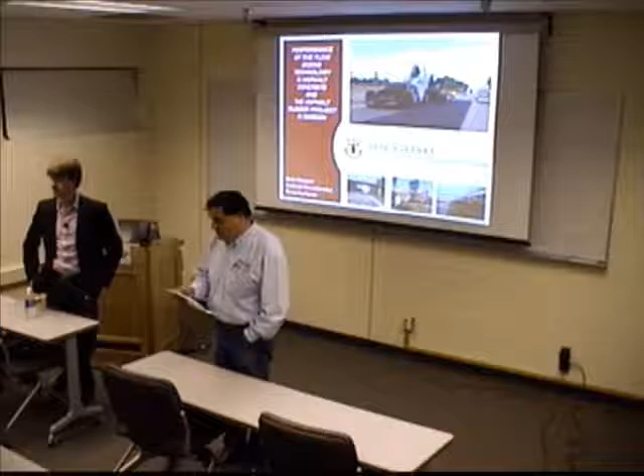So let me properly introduce him. He's a certified European professional engineer who has worked with road pavements for more than 20 years. He's active in a number of technical committees within Sweden as well as international. And he is the chair of the Swedish Association of Laboratory and Field Methods for Testing Road Materials. He was visiting Minnesota DOT as part of an exchange of information. That was in 2009. So he didn't miss the cold weather in Sweden by being in Minnesota.

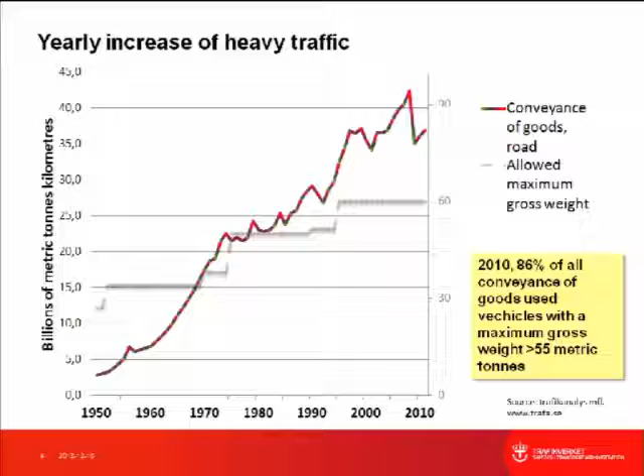And if we look at the paving market, I would say 99% of the pavements are bituminous pavements, asphalt pavements, less than 1% cement concrete. So we use a lot of asphalt paving. And the season for paving is short. It's between May and October. It happens that we also pave during November, sometimes even in December. It's not recommended, not allowed, but still we have a fiscal year that ends New Year's Day, so that means money's got to be spent.

The Swedish Transportation Administration, STA, is the end user of somewhere between 40 to 60% of the total market. So we are the big funder for a lot of the projects. And we also use about 10 to 15 million square meters of chip seals. So that would be closer to 15 to 20 million square yards of chip seals, quite significant. And we also use 1 million metric tons of soft asphalt mixes. That is mixes that are very soft.

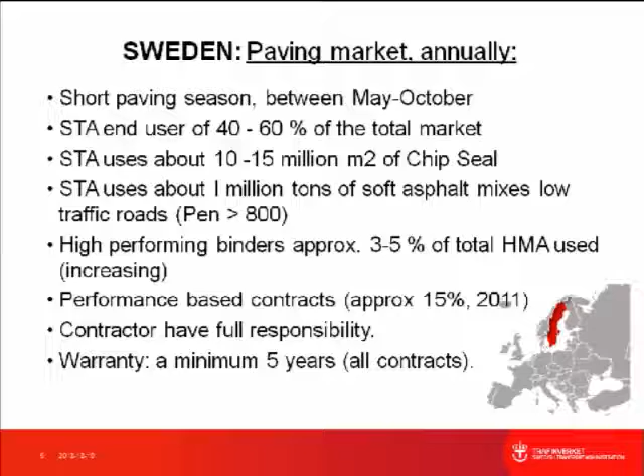When it's performance contracts, it's very easy to say that, of course, we're going to measure the performance over time, so that is in the contract. But when it's a standardized contract, we have a warranty procedure for that. And the warranty differs from the way the warranty has been introduced in the US. But that would take another lecture to let you know all about our warranty systems. So that was a little in brief about the road administration and the transport administration and the Swedish market.

So if we look at this performance of the flow mixing technology, that is a different technology. I want to acknowledge also the company KGO Mixing, where the inventor, the scientist behind this, his name is Carl Gunnar Ohlson. So that is the acronym for him. But also VTI for doing a lot of the research, helping us to evaluate the performance of these roads. And to explain to you a little bit about what is the flow mixing technology.

It is a technology to produce asphalt concrete mixes with same or better quality without use of extra additives. It's a technology where you can reduce temperature also. It has to be reduced without introducing an additive for that or foaming. So it's a warm mix technology, but this was developed way before warm mix. So it's through a controlled way of production. It reduces valuable sources of raw materials, saves energy, and gives long-lasting products.

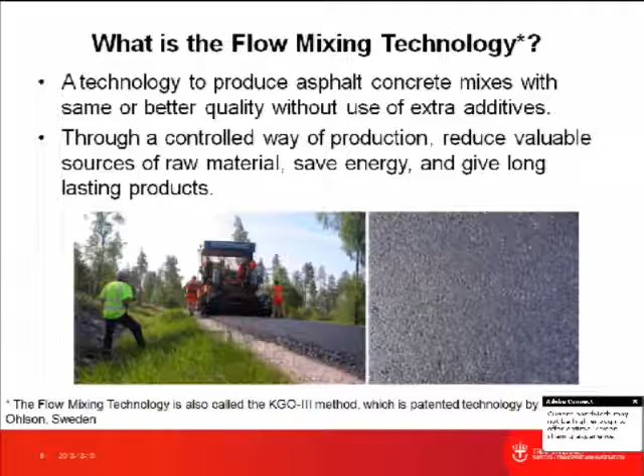So, the flow mixing method, the principles of mixing here is that we have a, let's see, can we? This one is not supposed to start until, well, it does. I'll back up later.

You know, when you sieve the material in a batch mixing plant, you can split it into a coarse fraction, you have binder, you have filler, and you have fine fraction.

And well, is this self-running? Shouldn't be.

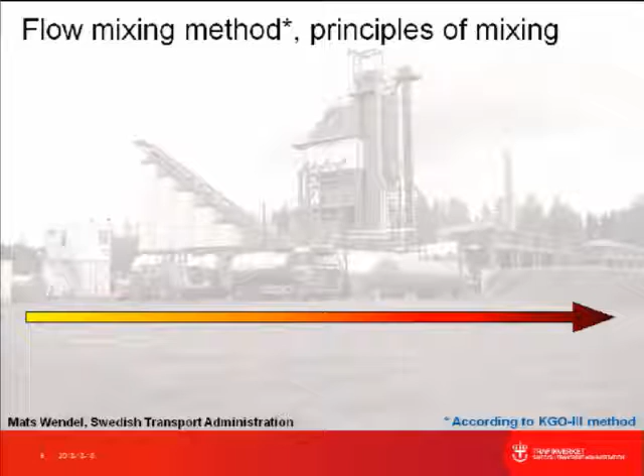So what we introduce is to have the coarse fraction, drain it with the binder, all the binder in there, put filler in a controlled way, distribute it evenly, and make the whole mix swell. And then we introduce the fine fraction rapidly. And that's basically mixing until black. So that is the principle.

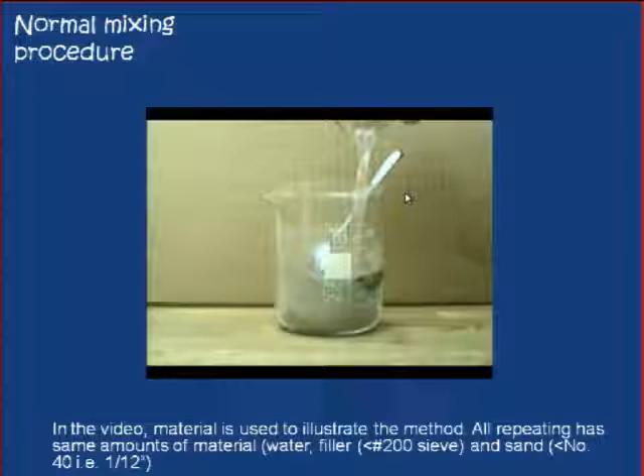And to illustrate this principle, we start with the normal mixing procedure in an asphalt plant, which is to have all the dry material added at the same time to the mixer. There are small differences in that, but basically that's been done. You add all material, you mix.

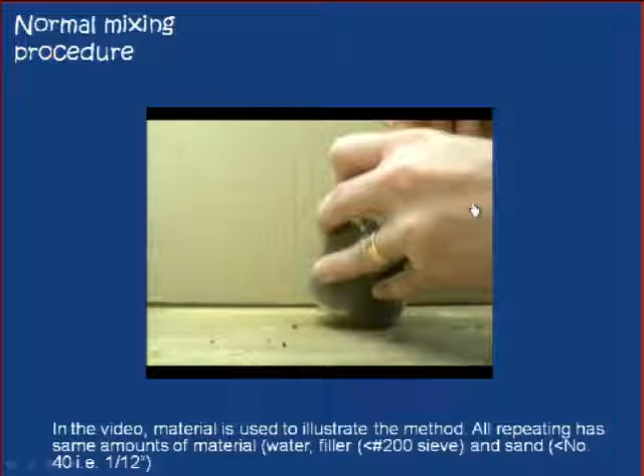Oh, sorry. Let's do this. And for you online, it was only the sound that went. I'll rerun it. Hope everyone can hear the sound now.

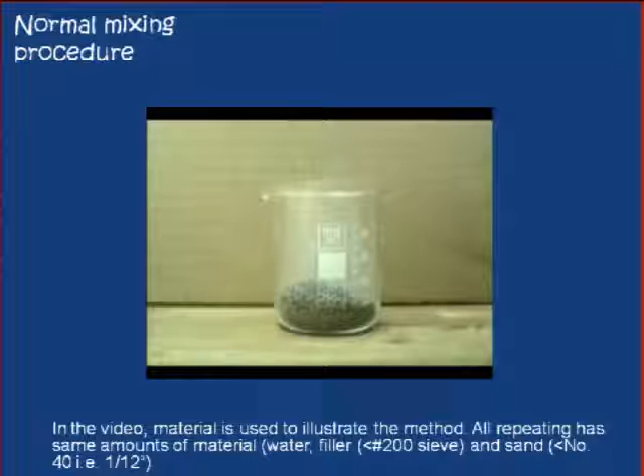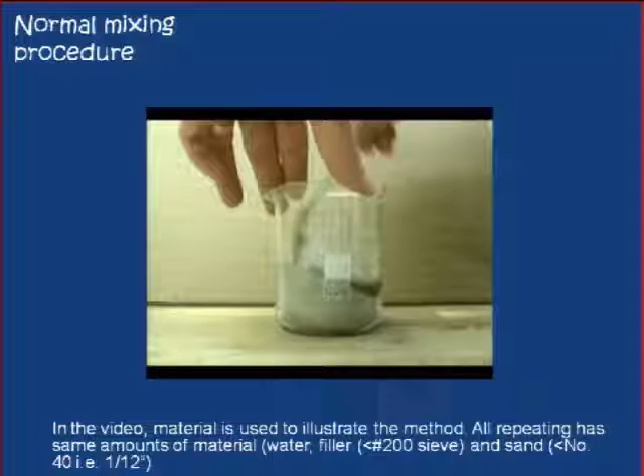So we add all the dry material, and in this case we also use water as a liquid instead of a binder, so you can see what actually happens. And mix. And it's my hands, so I'm not telling you anyone else is doing this. This is me. So I've done it.

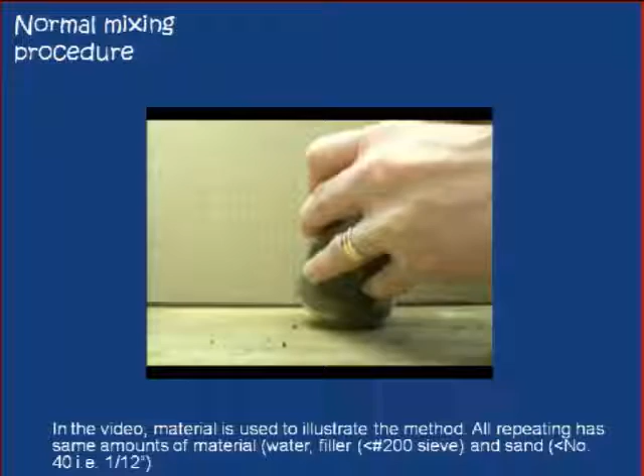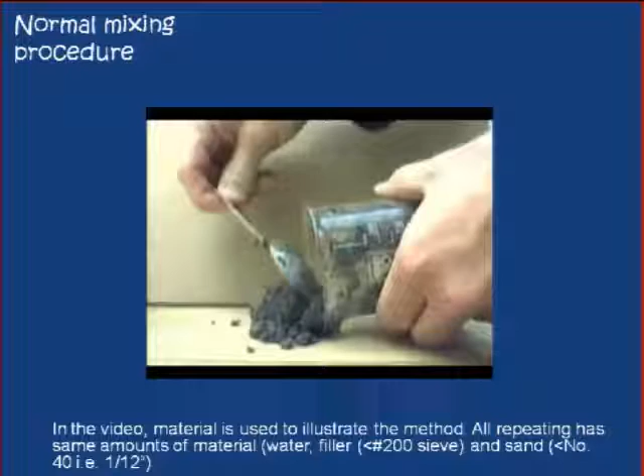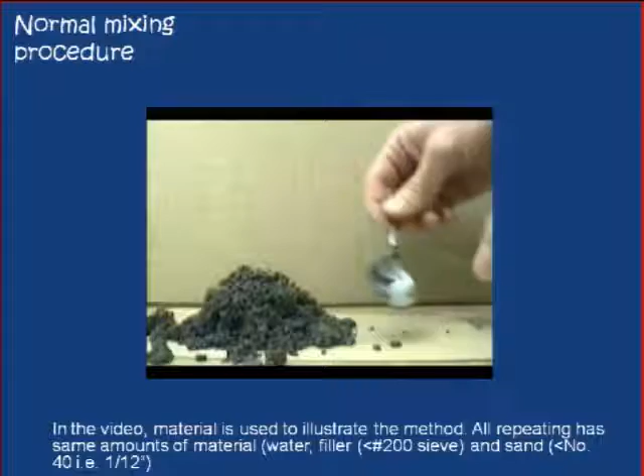So, mixing until everything is mixed, and then we pour it out. And so that was the paver, and here comes the compaction. And so we compact it.

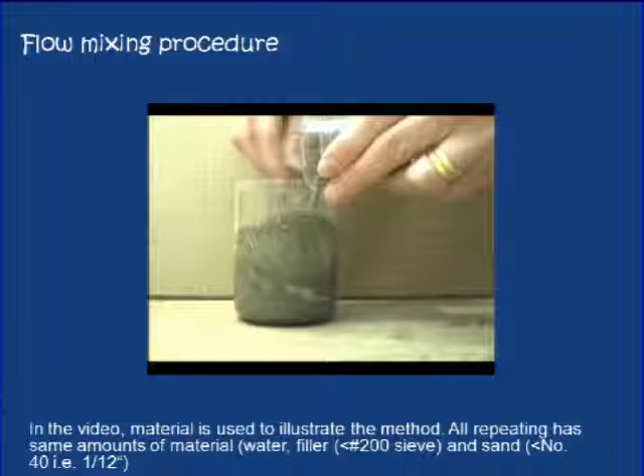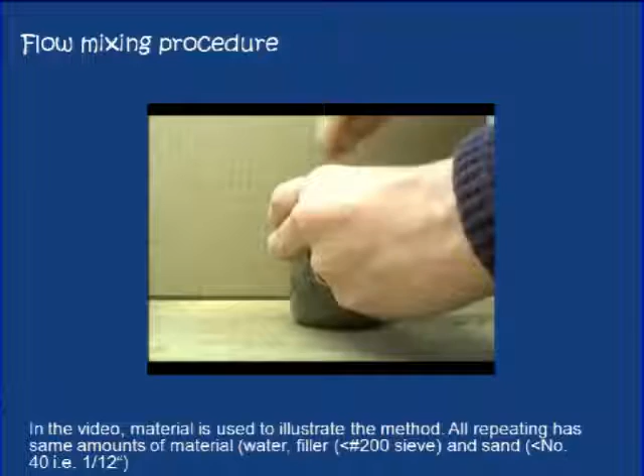And then we use this different technology. Then we add the liquid first, because we don't have a coarse fraction. Add the fine fraction to it. Mix, so all the fine fraction and water distributes evenly, and then the coarse fraction quite rapidly goes in and mixes around. And then I pour that one out next to the other one and hope that you will see a difference. So let's pour that one out.

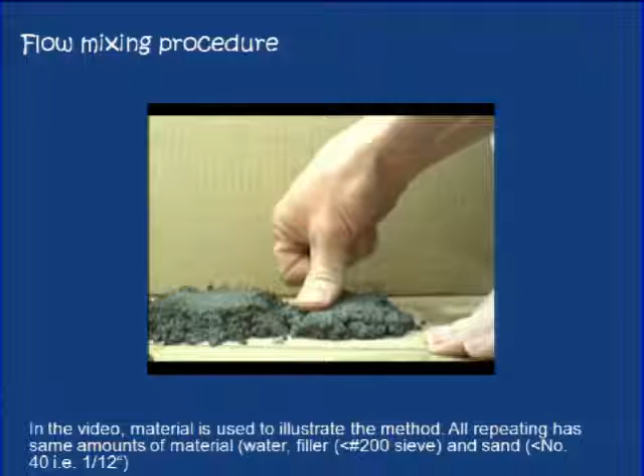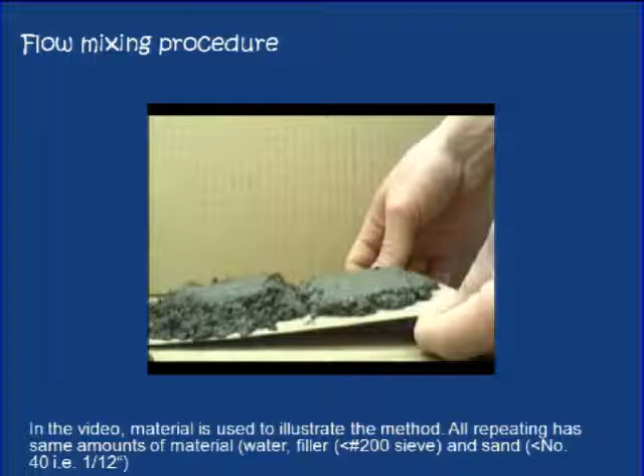And it's important to state this, that it's the same amount of materials, no difference there. And we compact this a little bit, hopefully. And this test can be repeated. So when I recorded this, I repeated it twice, but you can repeat it, and it's a really good learning curve there.

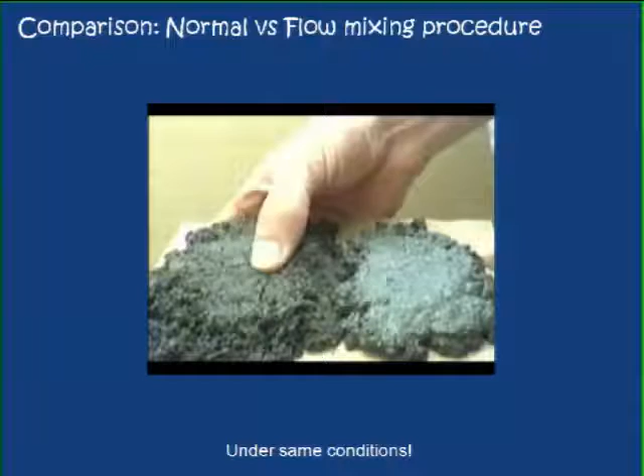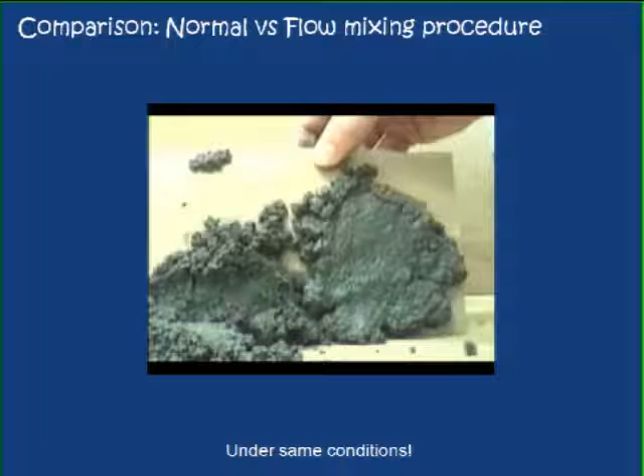So this is a comparison between these two, non-compacted. That one is acting the way it should, probably, and this one is acting strangely, because it's only binder and materials. And can you see a difference between these two? And those are under the same conditions.

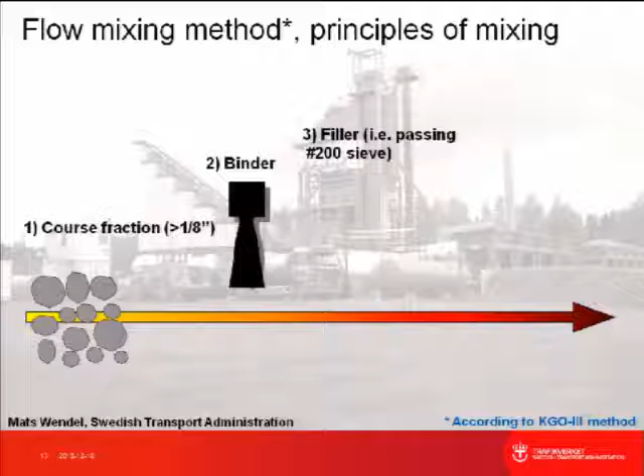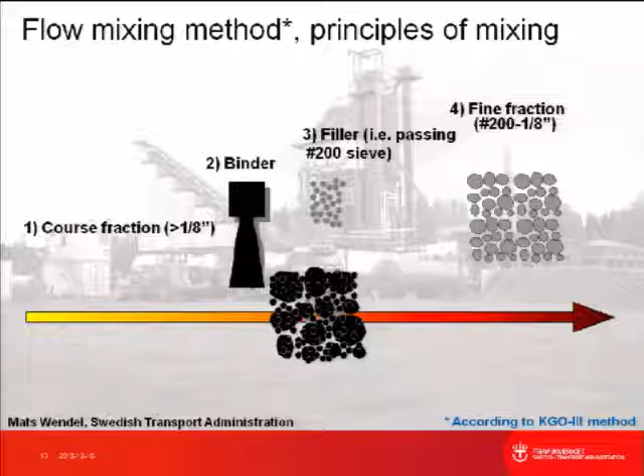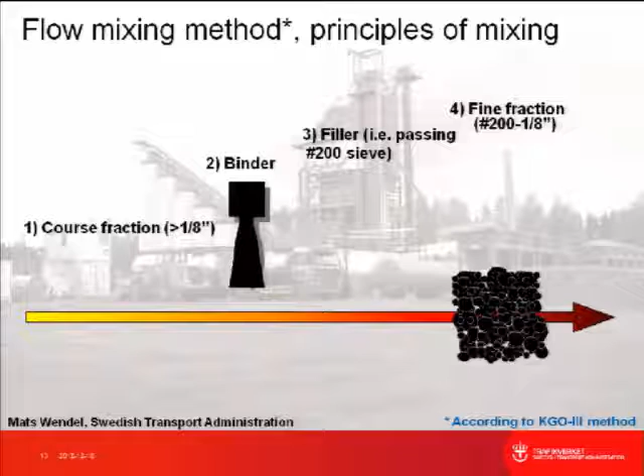So again, the principles of mixing: coarse fraction, binder, the filler, the dust particles go in, make the swelling, and then we add the fine fraction. And I don't know if there are any questions about how the method is done, or no. So I'll go on and show some examples from the real roads.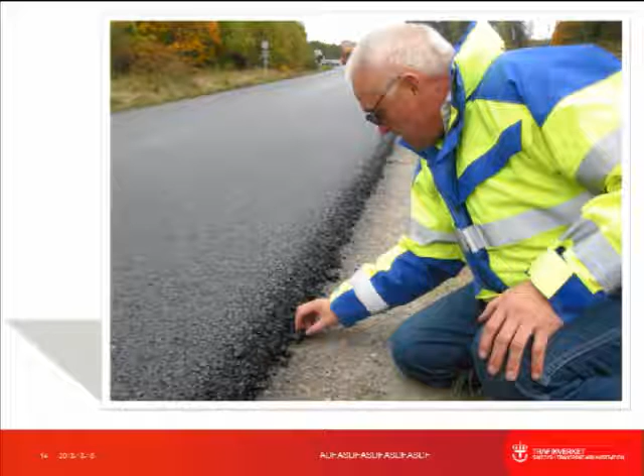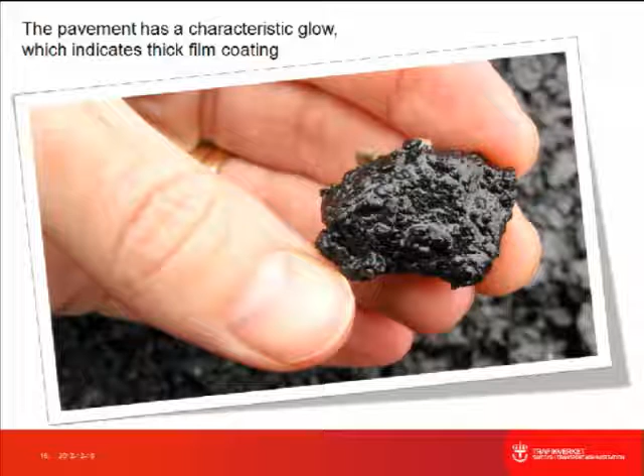When you're out on a paving site looking at this, we were fascinated, and we took some material from the side of it. When you look at it, it's got a characteristic look, and that indicates this thick film, the film thickness here, the coating, and that you also got the particles distributed evenly.

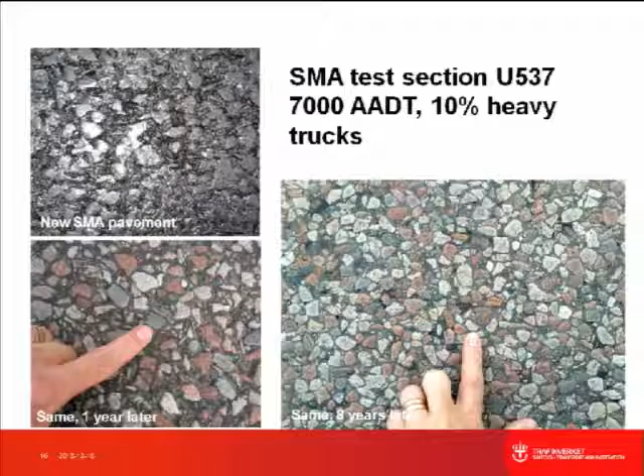If you compare it and we look at the test section, this one has 7,000 AADT, the traffic amount, 10% heavy trucks. When it was new, a year later, and this is 3 years later. It's pretty much the same surface. Very interesting project.

And what we've seen with this, by using observations and testing, is that we have to control the temperature. If we raise the temperature too much, we will have bleeding issues, drainage issues, drain down. And we also might destroy that thick film thickness. So we don't want to do that. In the top layers, the wearing courses, we use binder-rich layers, probably richer than you do here.

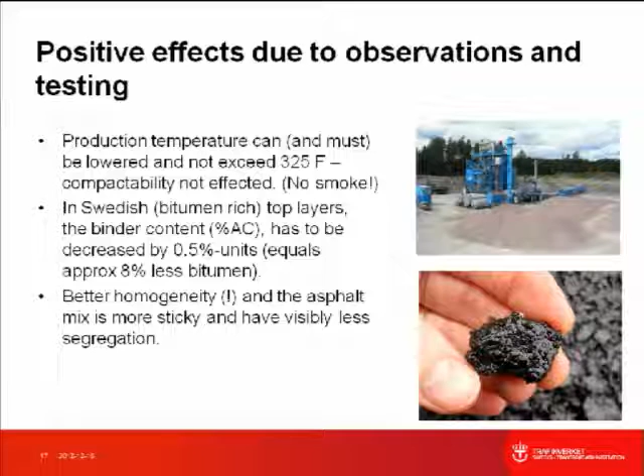We found that we need to decrease the amount of binder because it's too much binder. So we decreased the amount by up to 0.5 units. And we also see better homogeneity. The asphalt mix is more sticky and has a lot less visible segregation. So you can't really see where the trucks left the paver.

And this is really the key to ensure quality, because as an agency we had contractors perform the work, because we are only buyers. We don't have any equipment ourselves. We don't have any laboratories ourselves. We described the method, we paid them extra money to use this method, so we needed to know that they actually used it. So this was the way we could control it.

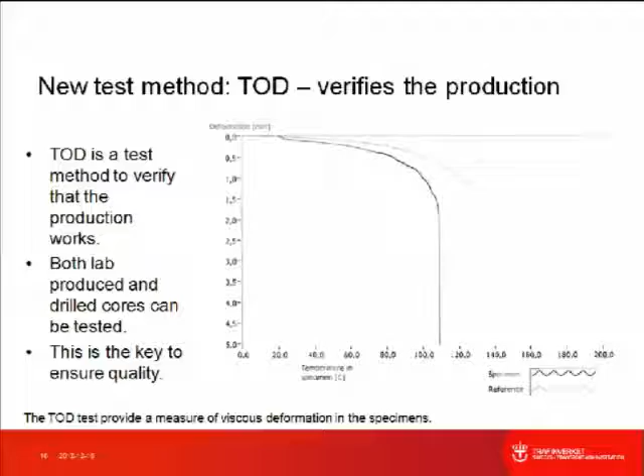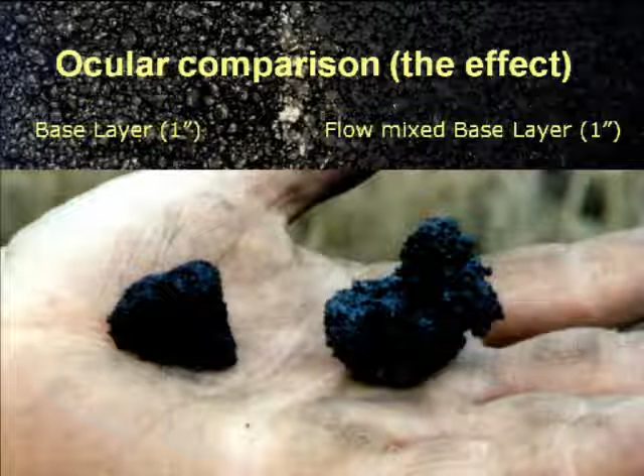In a base layer, where the maximum aggregate size was 1 inch, so it's a very coarse mix, we could really see the difference visibly, that the binder is used more efficiently in that mix. We've tried this on a number of different mixes, on a number of different binders as well, and we've tested all these different parameters.

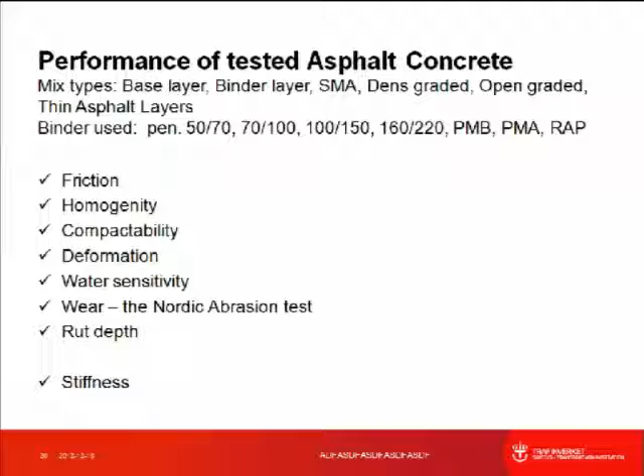One of the interesting things, especially if you lower temperature and binder content, is the freeze-thaw and salt water test. We have a special test for that used in research, called the winter conditioning test, that VTI does. They have a limit of 70 for saying that this is a good performing mix. So we looked at all those with the KGO method, and I think the slide has jumped a little bit.

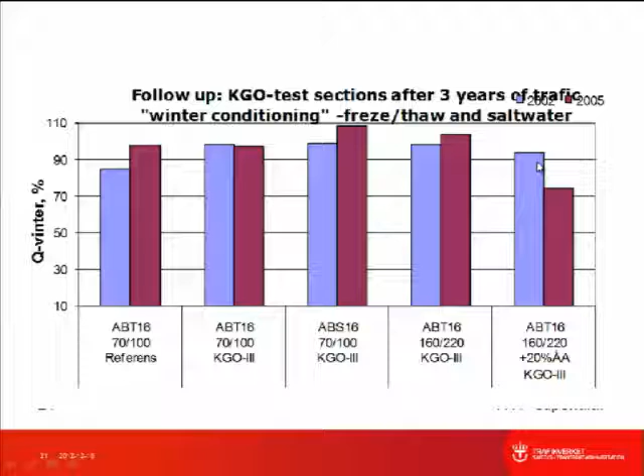On this side, you can see the 2002 values, and this is the 2005 year. So with 3 years difference, the reference increased a little bit. The KGO sections are performing really well. This one, however, had a decrease after 3 years. What's special with this one is that this is the test section where we first introduced RAP. So can you use this method with RAP?

Yes, you can, but what we found was that you've got to have the RAP introduced with the coarse fraction, and you've got to add mixing time to get the temperature in the RAP up. And this wasn't done. This was the first test of it, the test section. What was interesting was that this test tells us that this road should fail before the others.

We're still monitoring these roads, but that section is the only one that got a lot of cracks in it. So this one is going to get maintenance activities before all the others. And we're still evaluating, because it's interesting to look at roads now that they're 10 years old. So that's what we're doing.

You had a question? What's actually being measured in this plot? This is the indirect tensile strength test. It's very similar to the Lottman test, although these are core samples from the road, 5 samples stored dry, 5 samples conditioned. But instead of cracking the specimens, these are stiffness values.

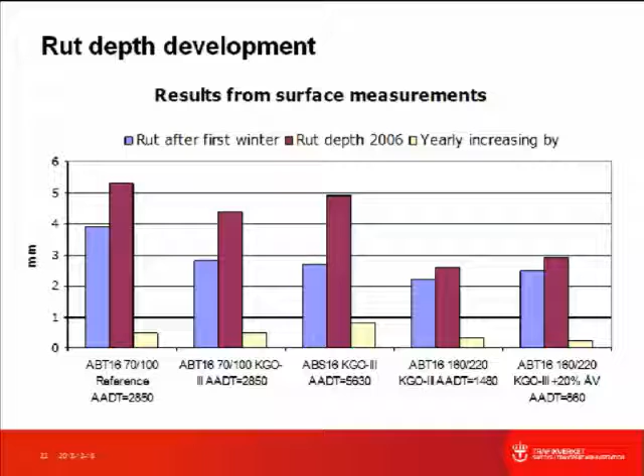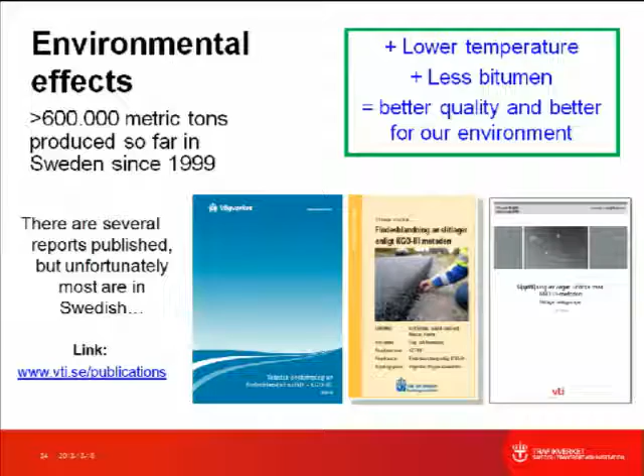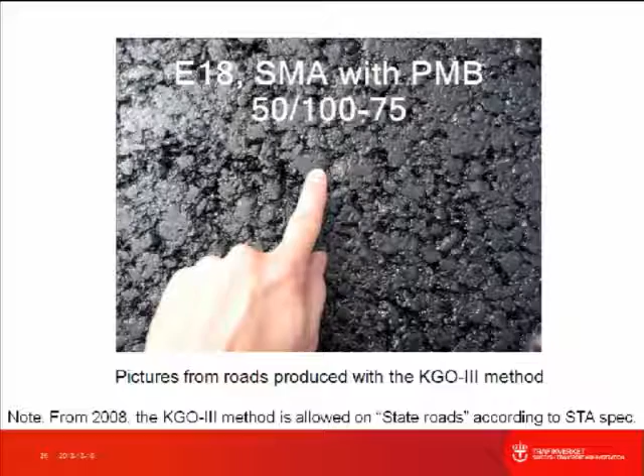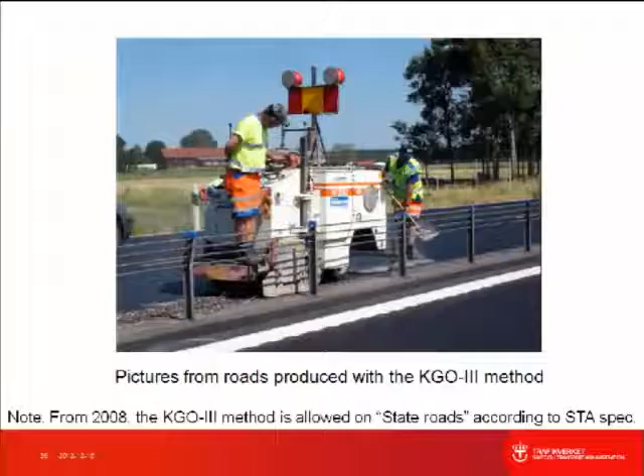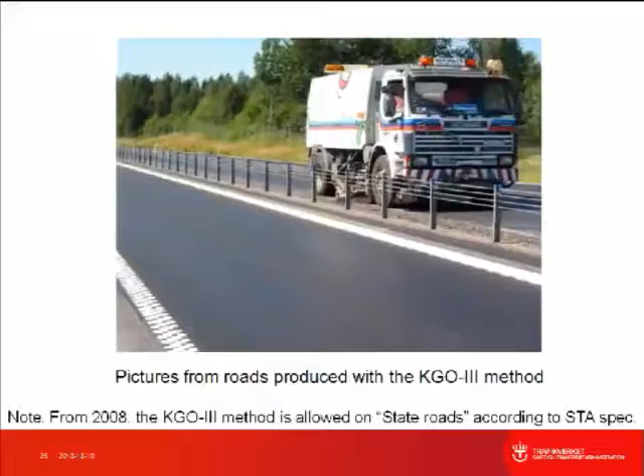Just a few pictures from other roads produced with this method, and also you can see pictures from maintenance activities on roads, typical roads in Sweden, pavers. This was a high-profile project where we have a lot of traffic. Those wake-ups, you have those as well, wake-up lines. We also introduced rumble strips in Sweden. We have a lot of them now.

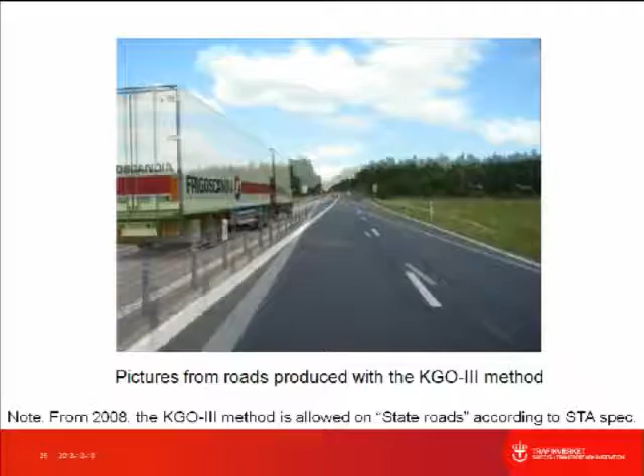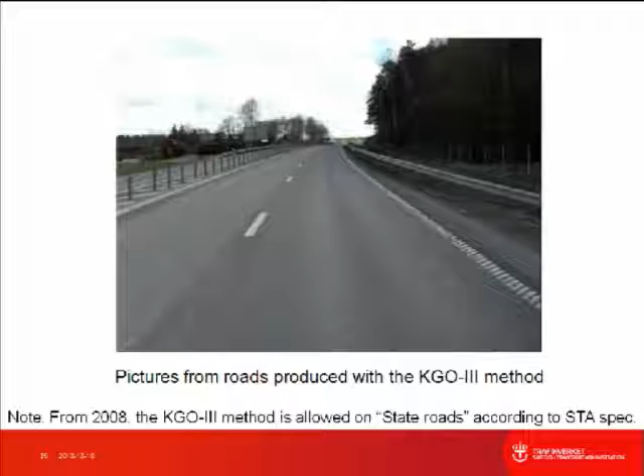That road was paved in 2005. It's got 18,000 AADT in each direction, so it's pretty heavily trafficked for being such a narrow road, and it's still performing.

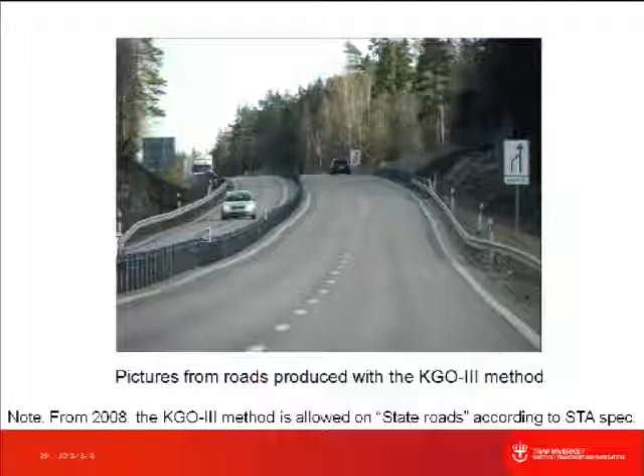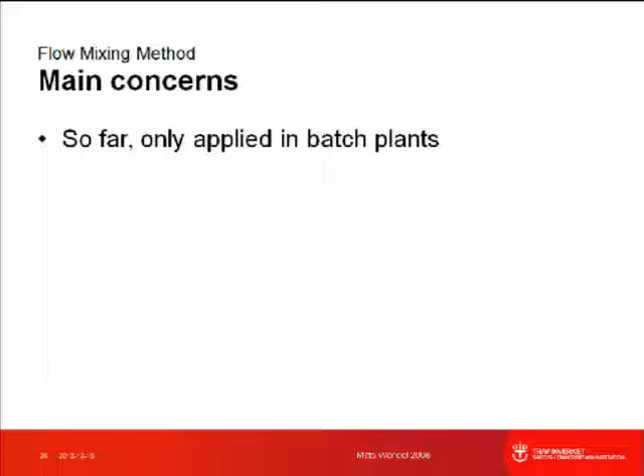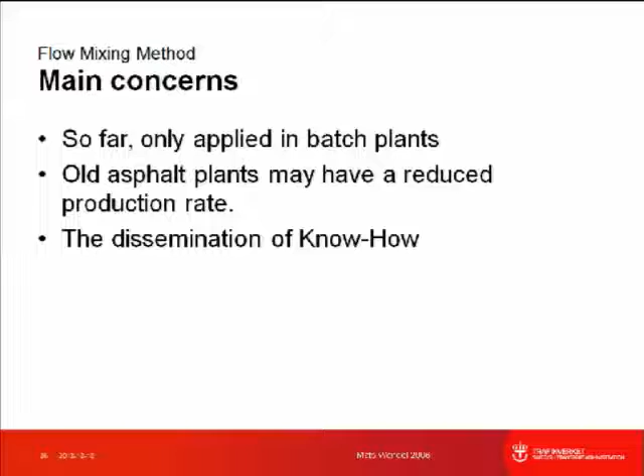Some main concerns about this method. Well, I mentioned the batch plants. Old asphalt plants may have a reduced production rate because of this mixing sequence. Of course, dissemination of know-how. It's not easy to learn this. And it's also very difficult to perform this procedure in the laboratory.

And some adjustments, such as gradation as well, AC content may be out of spec. It might not be allowed, but when we produced it, it still performs really well. So this might be the greatest hurdle to try to get over, which is the not invented here syndrome, the reluctance to try, that people don't want to try it, don't want to see it.

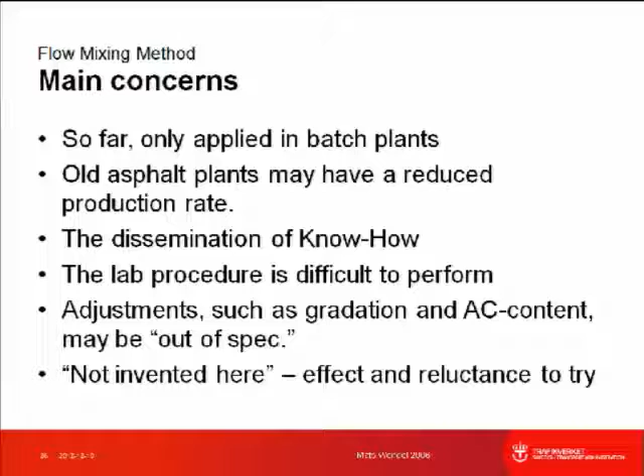So I've spoken about the advantages, the segregation. The deformation stability I haven't mentioned, but it's by rut depth if you look at it, and if you look at the test results we have, excellent performing. I've come across a few tender zone mixes, especially here, but this mix doesn't have a tender zone, and it's known. It's got years of good performance, and we can also quantify the environmental effects of it.

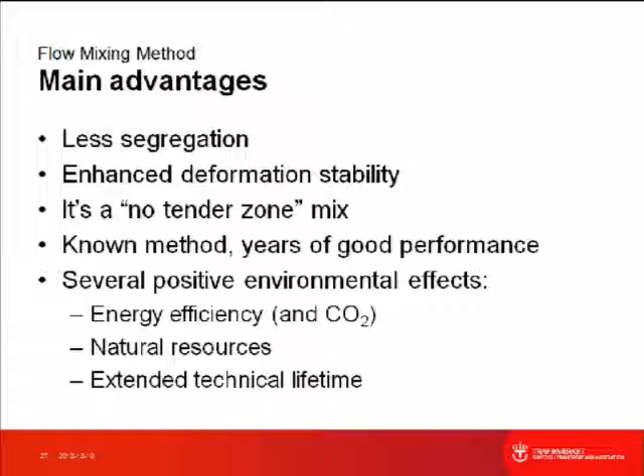And by that, this is the last picture of the KGO method, flow mixing method. Any questions about that? Interesting, or? It's quite different. It's a different way of looking at it. And when I've met people at conferences, when you say that we've looked at the mixing technology, they're quite interested because it's not that well covered. How to mix was defined back in the 50s. So, yeah.

I have a question from our online people. They are asking, what is the typical binder content? Of an asphalt mix in Sweden, a wearing course would be 6% asphalt content by weight.

Do you have any reason why this kind of mixing technology is producing mixes superior to the conventional ones? Do you have some physical reasoning to justify this? No, I think basically it's that thick film thickness that helps the mix, and the compactability of the mix. We use quite low air void content in the mixes. They're in the range of perhaps 3, 4, 5%, but not above 5%. That helps the mixes. Helps keep the water out of the mixes too.

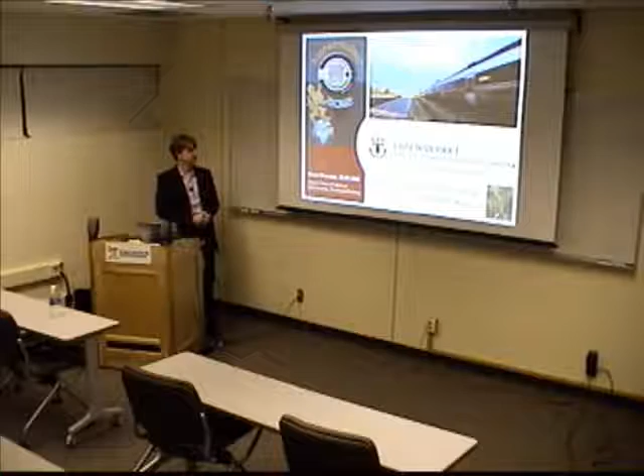Okay, should we move on to next? Because this is a presentation I made very recently. I went down to Munich for the World of Asphalt Rubber conference. That is an international conference. It was 170 participants. And that's why I also have the translation of the Swedish Transport Administration in German here.

I didn't mention this before, but the vision for the Transport Administration is that everybody arrives smoothly the green and safe way. So here's another picture of where Sweden is in Europe, if you look at it. On the sides here, let's see. We see Norway, we see Finland, we have Denmark here, the Nordic countries, we have Iceland over here.

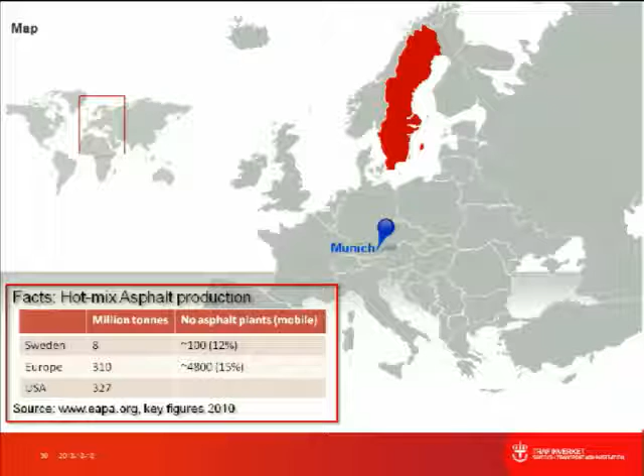And I also pulled up some facts about hot mix production. In Sweden, we produce 8 million tons of asphalt mix a year, approximately. Europe, it's 310. In the US, 327. And I should say that those numbers are reported by NAPA and EAPA. And if you go back just 2 years before, these are numbers from 2010. So in 2008, it was 500 million tons in the US. So the economic downturn really hit the paving industry in the US.

We've spoken about challenges and the traffic, but asphalt rubber is a new concept for road pavements in Sweden. It's not a new concept, but it was for us. And we started a project from 2007 until 2009, a 3-year project where the road administration at that time was the main responsible part. That meant that we took the responsibility for what the contractors produced when they produced asphalt rubber. We also rented in equipment and staff to produce it, and we tried to produce asphalt rubber in the best way we knew.

From 2010 and ongoing, we have a continuous study of produced test sections, and we also have continued implementation. And we are also in the situation where we put the responsible part to the contractors. So when we introduced it, we took the responsibility. Now we've proven it for the industry. We want the industry also to be a responsible part.

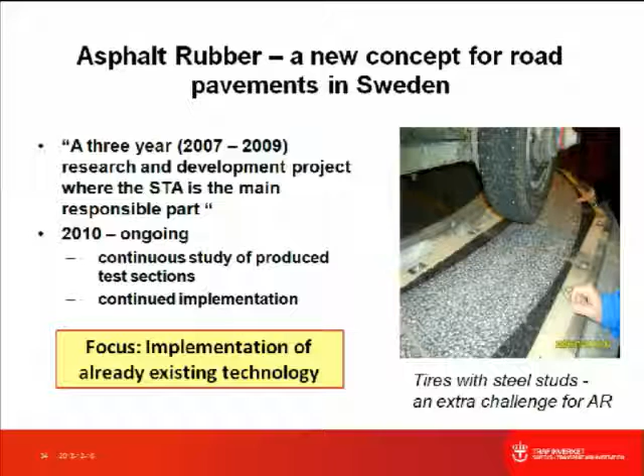The main objective is increased technical lifetime, and that will give us reduced annual costs. So life cycle cost will decrease. We also saw environmental advantages, the reduction of noise as one, and reduction of particle emissions from wear from studded tires. Also less wear. And some about increased traffic safety, better skid resistance, less splash and spray. That was reported in the literature and on other projects.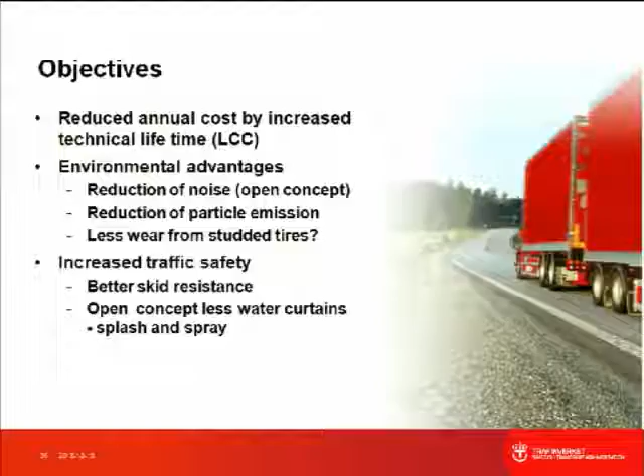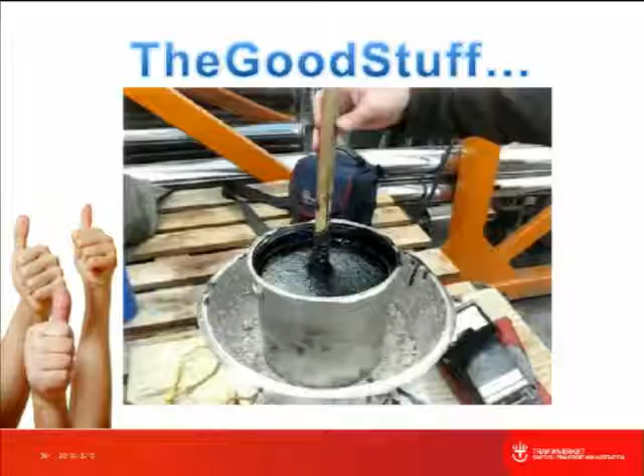The follow-up work really focused more on the technical lifetime, and we have also had some studies of this reduction of particle emissions that are promising. Asphalt rubber, the good stuff. This is a very short video clip. This is what it's all about. I'll show it once more. A binder that has excellent properties. A quick history in brief here.

Back in 2006, it started with a literature study. We went to the US for education. We went to the Asphalt Rubber conference in Palm Springs, California, to learn about asphalt rubber. And we decided to implement the wet technology. Back in the late 70s, we had dry mixing of crumb rubber as a technology used by one of the contractors in Sweden. And they had great success on some of the roads, and also great failures on some of the roads.

And this is a main obstacle why people won't use asphalt rubber. We had the same situation in Sweden. We had to convince ourselves that the wet technology is engineered. We can control this a lot better than we could with the dry technology. There are obviously a lot of environmental concerns when it comes to crumb rubber, when it comes to using old tires. And so we decided to do a lot of environmental studies. We rented a binder blender unit, and we produced the first test sections. That was 2007.

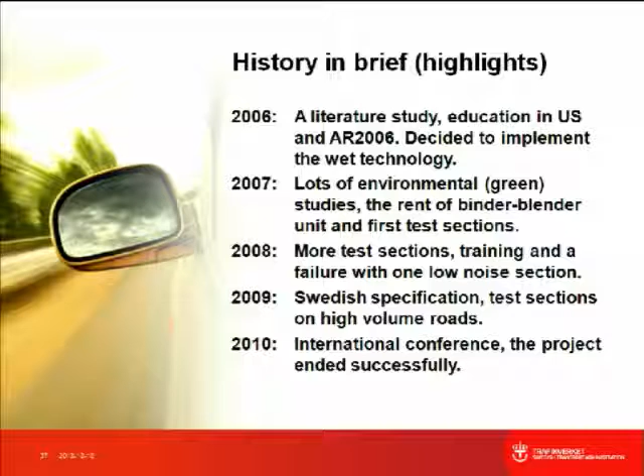We decided to mill it off, not trying to save it, not trying to keep it there. We milled it off, and we put another surface down with a different pavement. That one could really destroy a project if you put something down that is not comparable, but it's still carrying the name of something new that you're testing. So we took that one away, and I think that was good. We learned a lot from that.

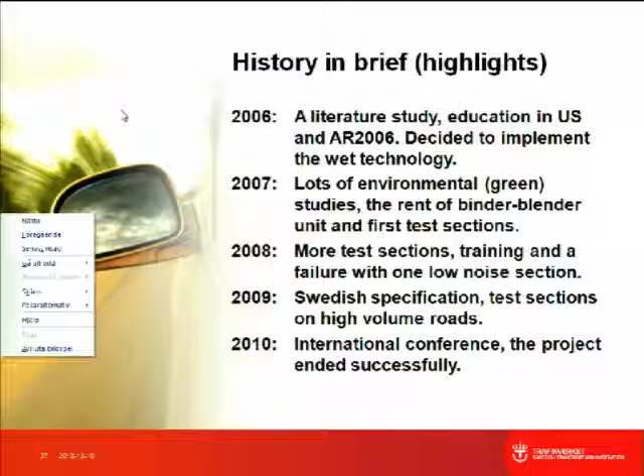2009, a Swedish tentative specification. We did more test sections, and we went out and produced it on high volume roads. In 2010 we had an international conference, and we also ended the first part of the project, the project that started everything. It's important to end projects, because from there you can be successful, and then you can do a follow-up project. So we started a new project in 2010 at the same time, called it second generation, with focus on more low noise sections and follow-up work.

Last year we tried to introduce asphalt rubber in a really cold climate with dense graded asphalt rubber. We also produced a thin layer with asphalt rubber. And we saw that the capacity problems on the blender unit really were a problem for us. In 2012, this year, we put out for bidding an innovation contract for the asphalt rubber blending service.

We also tried something we call a 50-50 evaluation bid, where the contractor in the tendering process leaves two bids, one with asphalt rubber provided with the blender unit, and the other one without. The average of those two bid sums is what you compete with. This gives us, as an agency, the opportunity to choose, but it also covers all the contingency things that can happen. And it was also good for the contractors. They haven't complained, because it's very clearly stated that we buy on the average of two bids, and it's still the lowest bid that wins.

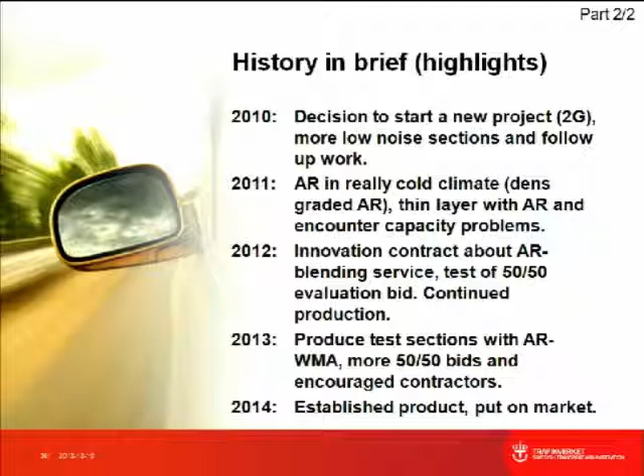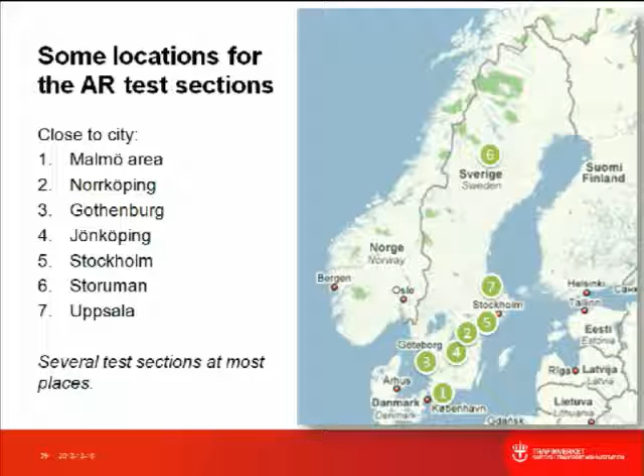In 2013, next year, we will produce test sections with warm mix technology. We want to continue this with the 50-50 bids, and we want the contractors to be encouraged. By 2014, we think this is going to be an established product on the market, where we can buy it wherever we need and want it. Some of the sections you can see here, from the southern part up to the northern part, and several sections at the same location.

I spoke a little about the environmental restrictions. We have a chemical agency that wasn't too happy about us putting rubber into asphalt. We explained to them what we're doing and how we control it, and after a while they were really encouraging us, and thought, well, control this and you're okay. There are technical production issues that need to be overcome. CE marking, you don't have it here, but we have it in Europe. Every piece of equipment has to be CE marked, basically saying that the workers won't be harmed by the equipment.

There's also a hookup issue to hot mix plants. Every hot mix plant might be different. It's unique, so you have to have a unique hookup system for it. And of course, the contractor has to be willing to pay for this. For the crumb rubber supply, we had to buy crumb rubber from outside Sweden, but now we do have a manufacturing unit that can sell us crumb rubber. Of course, mix design and laboratory work are really important. You can't put mix out there unless you control it. You have to know what you're doing.

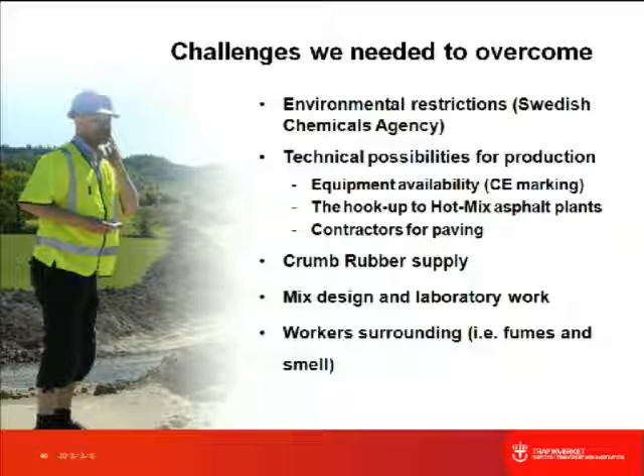And of course, the work environment, fumes and smell. Asphalt rubber has a different smell, so you have to prepare for it. You have to know what it is. If you don't know what it is, you might have a real issue with it. If you know what it is, we haven't encountered those problems.

I stated that the focus was on implementing already existing technology, and in that we also had ASU help us do the evaluation of our mixes, so they could compare. And they're thinking we're putting pretty tough mixes down. They like what they see. VTI helped out a lot.

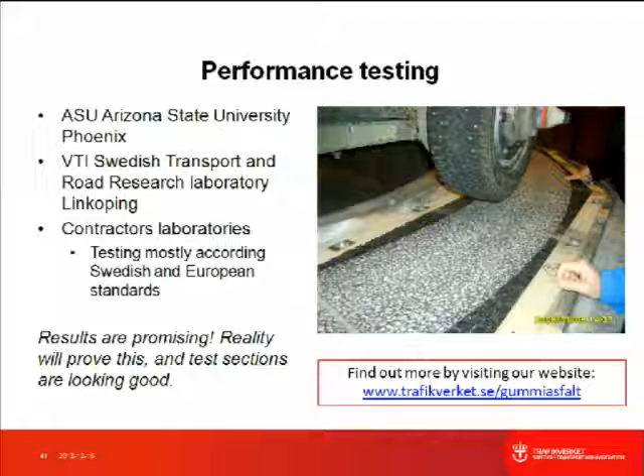We also have the contractors' laboratories, and we have used Swedish and European standards for testing. But we've also used the US standards when it comes to the testing that ASU performed for us. Results are promising. We will see this in reality, but the test sections right now are looking really good.

We focused a lot on environmental studies, and every paving site has at least one measurement done on the workers. So we test every paving site right now. And what we've seen is that the PAH is far below limiting values. Most of the time we can't detect substances. Weather conditions have an influence on the air quality for workers. So if the temperature is high and the wind is standing still, then we have more readings.

We also looked at whether the asphalt rubber binder has increased leaching, and we have found PAH and cresols, but those are low according to limits. And this substance benzothiazole is what we can see, and that is what's giving the rubber smell. It was classified as having no acute toxic effect, but it's been very hard to detect benzothiazole at the worker's site. Particle emissions, we also got lower emissions from that.

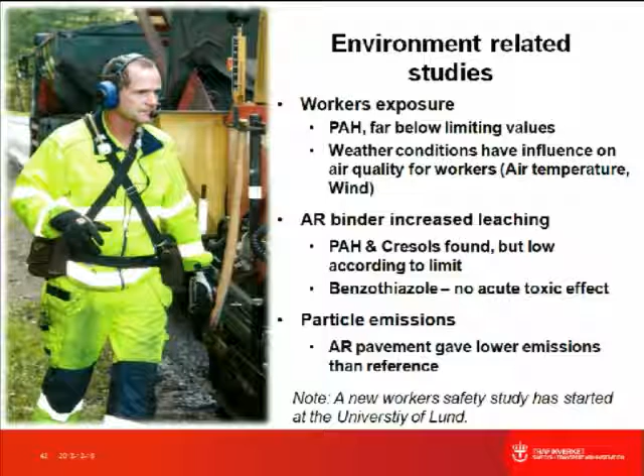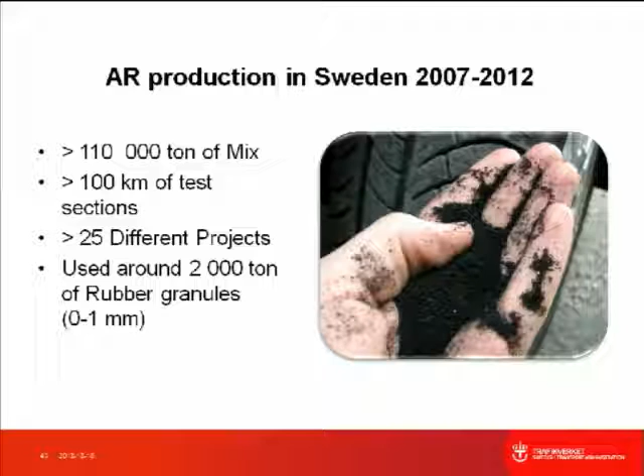Asphalt rubber production so far: 110,000 tons of mix. It's more than 100 kilometers, that would be 60 miles, of test sections, something like that. 25 different projects. We have used more than 2,000 tons of crumb rubber granules. What we've seen is that we can produce asphalt rubber with, as expected, good quality. We can control the environmental issues, and we can't see a negative impact.

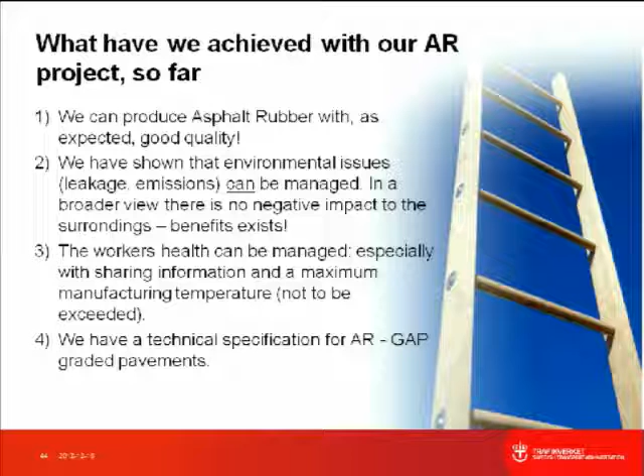Workers' health can also be managed, especially if we share information. And we also have in our specification a maximum manufacturing temperature that is not allowed to be exceeded, because then you have increased fumes. And we also have a technical specification. So it's definitely a concept for Swedish roads.

In any project, a word of advice. A successful project can be achieved if you do your homework. Do your homework properly, investigate, get know-how. That's how you are successful. And you've got to make a plan for the project and get funding, of course. It helps to have skilled personnel, but you also need champions. We had a really good champion in this project, the project leader Torsten, and he's been an advocate for this, and he's really knowledgeable, and he knows what he's doing.

It's also important to manage your risks and see the opportunities. In any project, there are going to be risks. And maybe the most important part is to share your experience, because then people can ask you even more questions, or you might get other inputs. Share your experience, really important. And that concludes the second presentation.

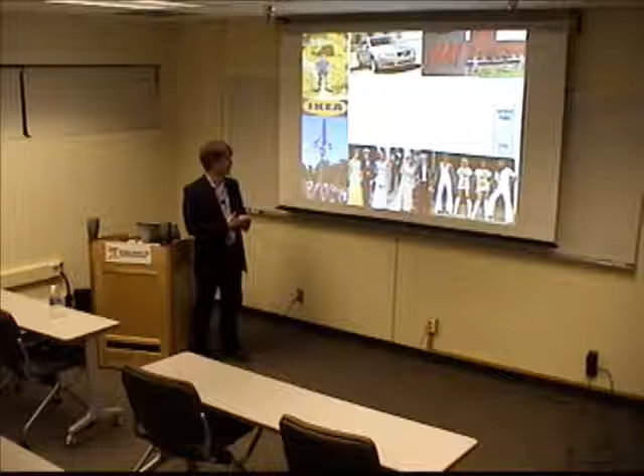So, everyone see what's on the picture? Vodka you identified. ABBA you might know of. The Swedish, well, sometimes people say Kingdom of Sweden. We are royal. We still have a king. And last year we had a baby born. The year ahead of that, our crown princess married, I would say, almost like a farmer's boy or something like that. So that was a fairy tale story, covered by all the news networks all over the world. So.

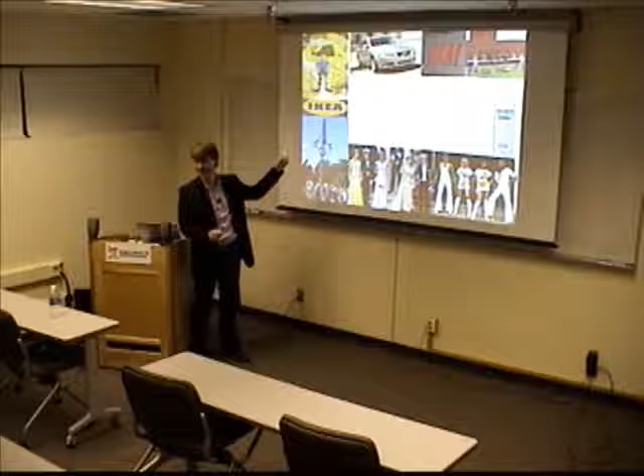Midsummer is big in Sweden. IKEA, you've heard of. And I went to IKEA when I traveled here. Pippi Longstocking, you've heard the stories, the books of Astrid Lindgren. If you have kids, those are great stories. Volvo, of course, and H&M, Swedish. And that's only a picture from summertime also. You have Zlatan Ibrahimovic too. I didn't hear you. You have Zlatan Ibrahimovic, the soccer player too. You put it there. Oh yeah, oh yeah.

You know, it was just a week ahead of the conference in Germany. So when I went there to Germany, you know the expression, don't mention the war. Don't mention Ibrahimovic. Zlatan Ibrahimovic in Germany, that would be bad. They lost. Yeah. Thank you.